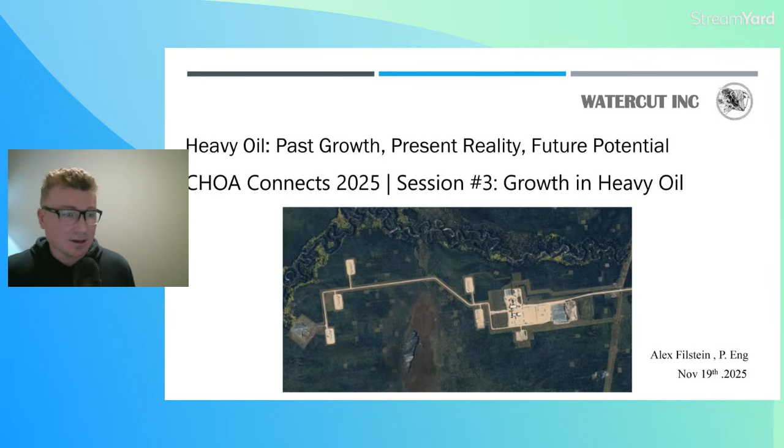And so I'm looking forward to sharing the whole slide deck from what I prepared, and I think it could be useful to everyone that's involved on X and LinkedIn, and who cares about this topic, to see where we go from here when it comes to heavy oil: past growth, present reality, future potential. And this was part of my talk at the Canadian Heavy Oil Association.

So the importance of Canadian heavy oil, from one perspective, is in the concept of reserves. As of 2022, world oil reserves: you can see here Venezuela 17%, Saudi Arabia 15%, Iran 12%, and Alberta within Canada is 9%. Now, over 90% of that oil is Canadian oil sands. And on the right, you can see 80% in situ, 20% mining. So out of those reserves, and we're talking about 170 billion barrels, something like 135, 140 billion barrels will be in situ.

And the main difference is that in situ barrels, you cannot really mine like you would mine at surface. At surface, you will use trucks to mine the oil sand. You will take that sand and the oil that's saturated within that sand and process it, remove the water, remove the sand, sell the oil and then refine it. You cannot do it in situ because it's just too deep to mine. And so that's one of the angles: the opportunity associated with Canadian oil reserves when it comes to past, present, and future is fairly significant, and that's why it's important to address.

The other angle here is that Canada is one of the top global producers of crude oil, including lease condensate. As of 2023, Alberta was producing similar rates to Iran, China, Iraq, but the Canadian population is nowhere close to the population of those countries. And so Canada, Alberta, plays an important role within broader oil production rates. You see US 16%, Russia 12%, Saudi Arabia 12%. And so Alberta is right there.

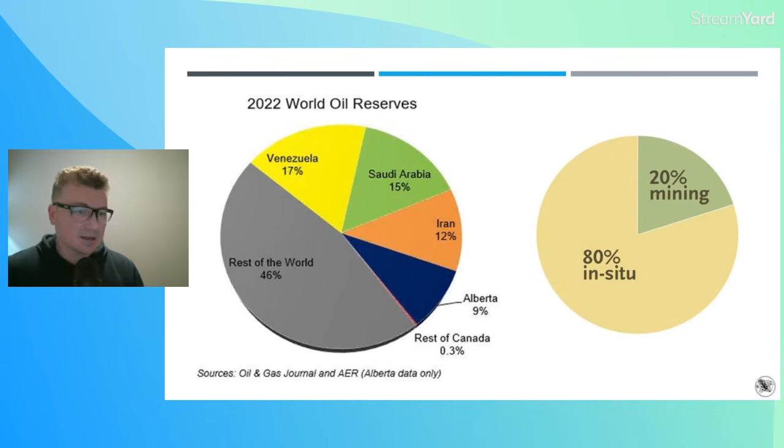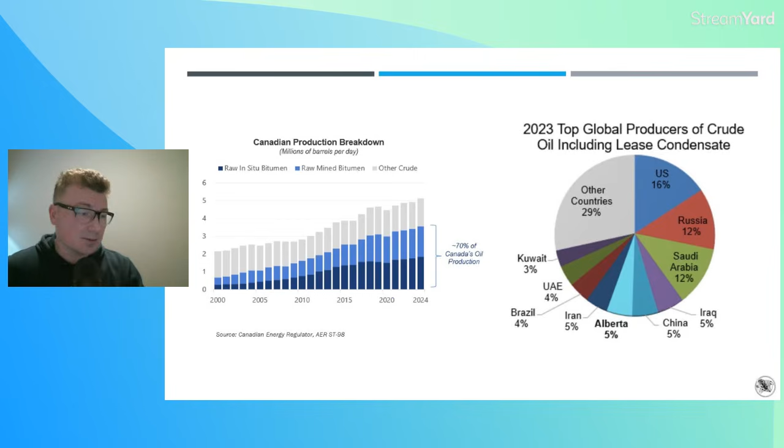And my talk will focus mainly on the in situ bitumen because, just like what we said in the previous slide, the majority of the reserves are in situ. 80% are in situ bitumen reserves, where production right now is about 1.7, 1.8 million barrels a day, and about to increase to 2 million barrels a day.

So the main technology that drives the recovery scheme for in situ production is the SAGD technology. And on the left, you can see the way it works. You will have an injector well, so you inject steam through that well, and a production well at the bottom. And what you really want to do is inject steam so you can transfer the enthalpy that carries that heat downhole, transfer that heat to the oil, and drain it by gravity. So that's why it's called steam-assisted gravity drainage.

So you can basically produce the oil, which is as hard as a hockey puck and too deep to mine. As you can see, way in the ground. It could be 300 meters, 400 meters or so. And that pressure could be 3,000, 4,000 kPa, right? And so you've got to inject that steam at steam conditions, transfer that heat, and produce that oil by gravity. And this is the core technology today that's utilized for in situ production.

The inventor of this technology is Roger Butler, and he developed this concept in the late 1970s, but the concept was commercialized in the late 1990s, 20 years later, right?

So one common theme that I hear people complain about is that technology development takes a very long time in our sector, but the reality is the core technology, which is SAGD, took two decades to develop and commercialize, and then another two decades to really bring it to 1.7 million barrels a day, while we're still optimizing on this concept.

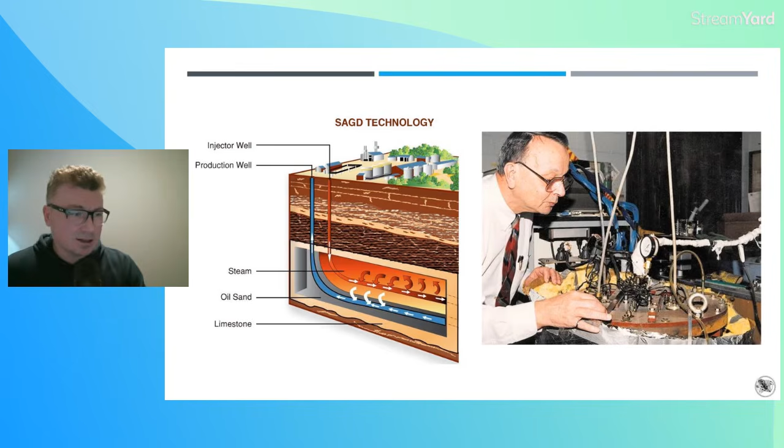And you can see he is working on some kind of pressured vessel there. We're trying to maybe optimize some VAPEX process complementary to SAGD, which is a vapor extraction process, where non-condensable gas could be co-injected with steam to maintain the bottom hole pressure in those reservoirs. And so he's been working very early on that, and we see huge implementation of non-condensable gas utilization in our current reservoirs. And the steam chamber development in SAGD, solvent processes, non-condensable gas processes, is really a function of equations of state that we utilize.

So often we will use the Peng-Robinson equation of state, but here I put a very simple one. It's PV = nRT, so the ideal gas law. And in the presentation at the CHOA event, there was a presenter, his name was Chad. He talked about how every smart presentation should have some kind of equation, and this was my equation version for that. And this is derived from the Boyle-Clapeyron equations of the ideal gas law, but let's focus on what it really does here.

So P stands for pressure, right? So in situ, you already have built-in pressure because of the height of the chambers, where they're located way underground. So 300 meters, 350 meters, 400 meters. And so the pressures, as I mentioned, could be as high as 3 MPa, 4 MPa. Now you have the concept of volume, which is V, where you inject steam. There is a displacement mechanism, but you also need to pressurize.

And over time, as you develop the steam chambers, as you can see in this picture, you grow those chambers, but you need to inject more and more steam over time, which increases the steam to oil ratio. And that's why non-condensable gas utilization is taking place, to basically reallocate the steam. And that's what we're seeing in the industry. And so the industry is also busy with the amount of substance that's being injected, basically steam. And that's one of the core challenges, that you don't have infinite steam.

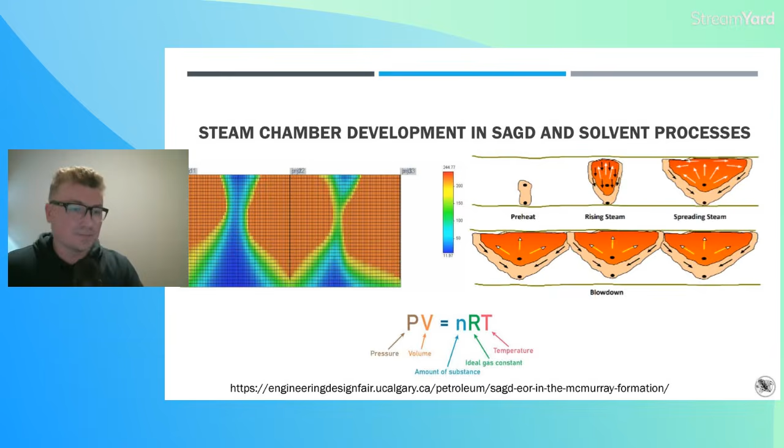In addition to that, there is some lithology associated with reservoir parameters. So for example, we could have a sandstone that could have very nice permeability, very nice porosity, very nice thickness, as I mentioned, but you can have other geologies in those reservoirs, like breccias, IHS, mud-dominated IHS. Those stand for inclined heterolithic stratifications. And those really are mud-dominated beds, sandy interbeds or muddy interbeds that are not necessarily good for reservoirs.

They're almost like ceilings in the middle of your reservoirs, and they basically limit steam chamber growth. They could result in no heat transfer to upper levels of the steam chambers. They can also hinder steam chamber development. So those are the things companies are also focused on these days.

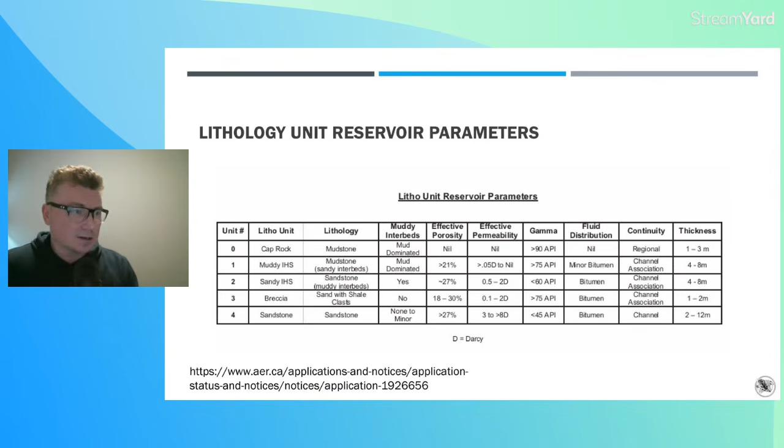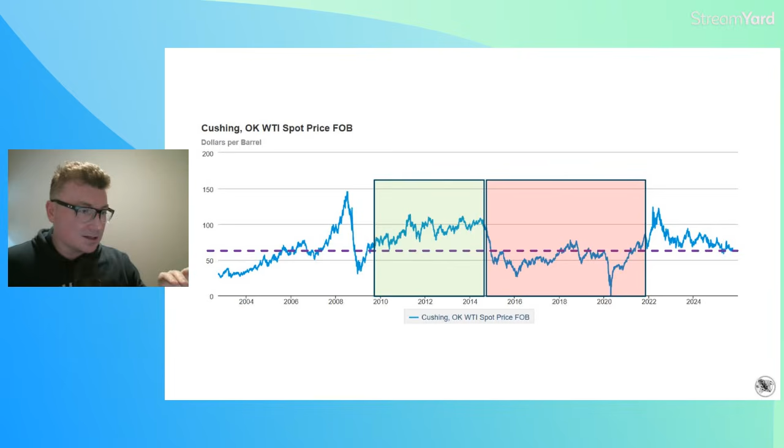Okay, so let's look at some examples right now. If we go back to the oil prices, you can see here, right? And we're going to see soon some examples of oil production rates. You see the green rectangle, so 2009 to 2015, and red rectangle, about 2015 to 2022. So very important time frames, oil prices high, and oil prices low in red. And let's see what happens close to those time frames.

And there was a comment at the conference by Tom Geer from MEG Energy. He mentioned that not everything is about home runs. The current development in the sector is really about singles and doubles, right? So the home runs were during that huge growth time frame, between, I would say, 2005 to maybe 2016, 2017. But then the ability to generate steam or injection capabilities through boilers and OTSGs is basically plateauing, but you're still able to produce a significant amount of oil.

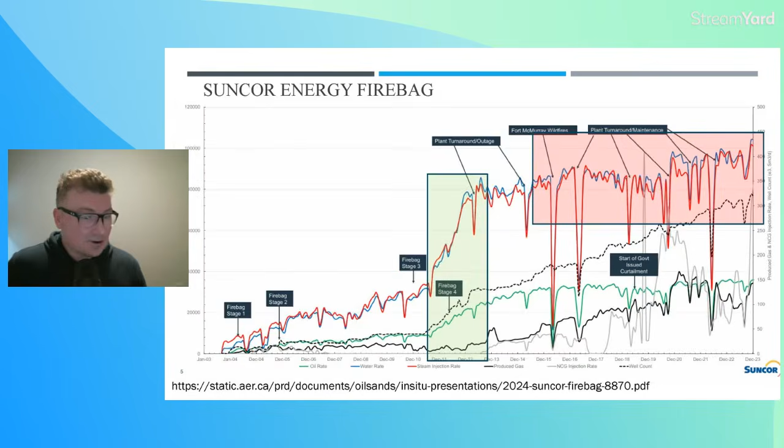Now, as we talked about NCG co-injection, you would notice that I mentioned the gray graph here is injection of that non-condensable gas. But look what happens here. They're telling us that on the vast majority of their legacy well pairs and pads, they in fact inject a significant amount of non-condensable gas; co-injection has been implemented on the following well pads at Firebag.

So 101, 102, 103. And what this speaks about is the coalescence of those steam chambers with those pads and their ability to inject NCG. It doesn't condense, so it's non-condensable, and it allows pressure maintenance in those chambers.

Now, the main driving mechanism, though, for those chambers is the steam injection, because that's what transfers the heat to produce oil by gravity. But then you have a challenge of the steam chambers basically coalescing, growing, and as you develop steam chambers vertically, you don't have as efficient of a heat transfer, so your steam to oil ratio by definition is going higher.

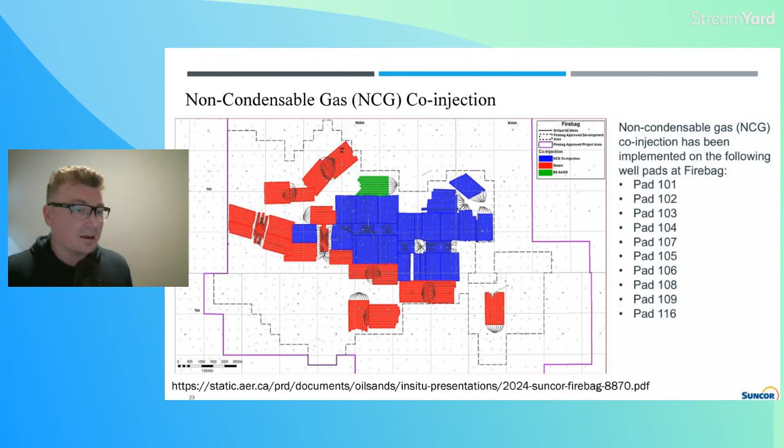And this technology really helps them to maintain a steady steam injection rate, but growing the asset and developing better geology, as you can see in basically red pads.

So here is another example of one of the biggest assets, and just to put this in context, I picked those assets because those are the biggest assets in Alberta, and they're around 1 million barrels a day from the sample that I talked about, which is 1.7. And so I think those are very important to consider.

So what you see here, you see growth in Christina Lake. So Christina Lake now is going to be kind of merged with Christina Lake for MEG, that just got acquired by Cenovus. And you can see here, again, significant growth in the green rectangle, somewhat plateauing steam injection rate in red.

So during that time frame, oil prices were challenging. And oil production rate goes, similarly to Suncor Firebag, to 250,000 barrels per day or so. And again, in the yellow chart, they utilize non-condensable gas co-injection and are able to maintain bottom hole pressure for legacy well pairs while reallocating the steam to new pads.

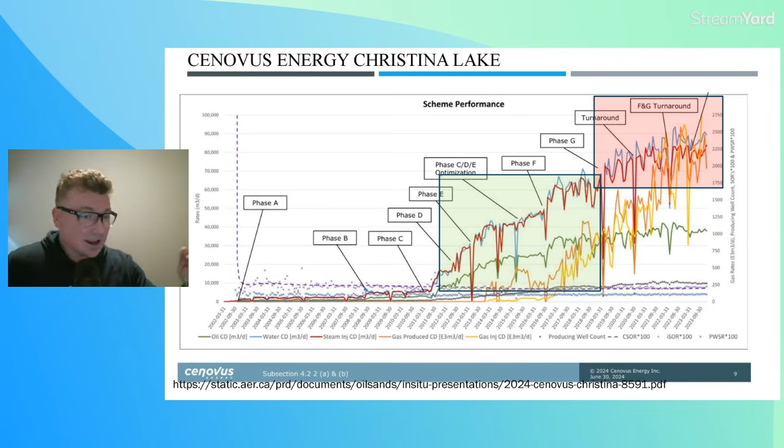What's really interesting in this time frame is that phase F and phase G, as you can see on this graph, it seems like it comes online a little bit later. And they actually talked about this in the 2012, 2011 AER disclosure about phase F and phase G amendments, and in 2011 approval for phase G and phase F. And so it came online in 2017.

And my key message to the audience at the conference was that, look, these are very complex projects. They take time to develop, they take time to design, they take time to put things in place. And those are not trivial, especially on this scale. And so we have to be mindful that when you go on such projects, not only does it take significant capital, it also takes time.

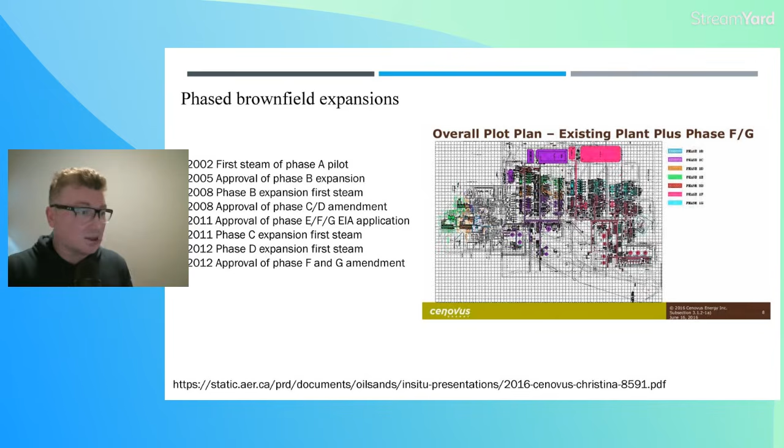And that's why during the downturn, we didn't see holistically in Alberta and Saskatchewan big projects being advanced from a greenfield perspective, and mainly kind of add-on brownfield projects.

So here now, let's talk about MEG Energy Christina Lake. So MEG Energy just got acquired by Cenovus, and we see a very similar story. During the 2014, 2015, 2016 timeframe, we see significant growth in steam capabilities. So phase 2B was very important to them. But at the same time, this growth, this capital was spent going into a downturn, right?

And so it was very challenging to be in MEG for that amount of time because you invested that capital, you grew your oil production close to 100,000 barrels per day from maybe 30, 35. So on this chart it's about 5,000 cubes a day, so that will be about 30,000 barrels a day. And now you bring it to 100,000 barrels per day at SOR 2 to 2.2, 2.4.

And you basically can't cash flow as much as you assumed between when oil prices were $100 a barrel, which is very complex and kind of not intuitive, I guess, because now your assumptions were not really realized in a sense. And so this speaks again to the huge uncertainty we have now going forward when it comes to bringing those type of assets online.

And the question is, at $59 oil, are we going to see those type of phases coming in where you need to spend significant amount of capital to advance these programs? And so my message to the audience was, my view is that what we're seeing now is basically the status quo, where we do see some brownfield development on some of those projects that are somewhat smaller, but we don't see greenfield development on the mega projects like what we've seen before. And this is a good example in phase 2B.

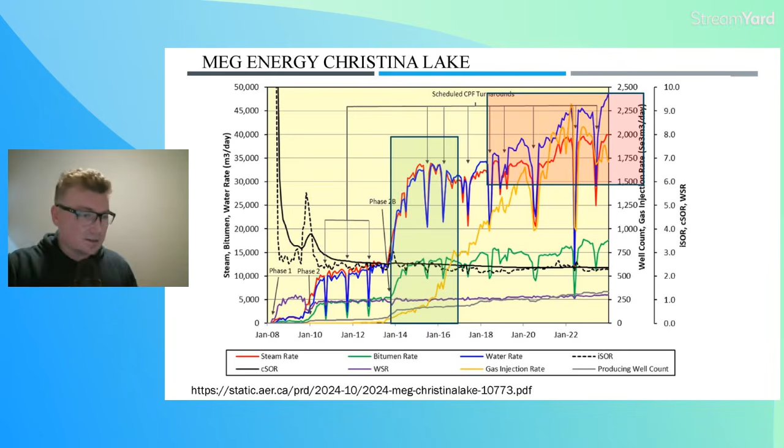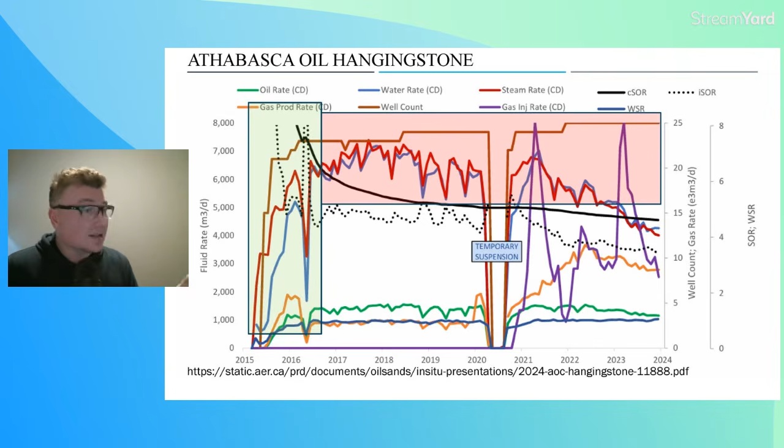Now, their configuration for the Hangingstone asset, which is what we just talked about for the Athabasca Oil Hangingstone asset, looks like this. So they basically have fork-type shapes, where the different pads are almost merging together. So when they co-inject non-condensable gas, it moves across the pad. So maintaining bottom hole pressure becomes extremely important. At the same time, you run a very high risk of that well short circuiting into your electric submersible pumps.

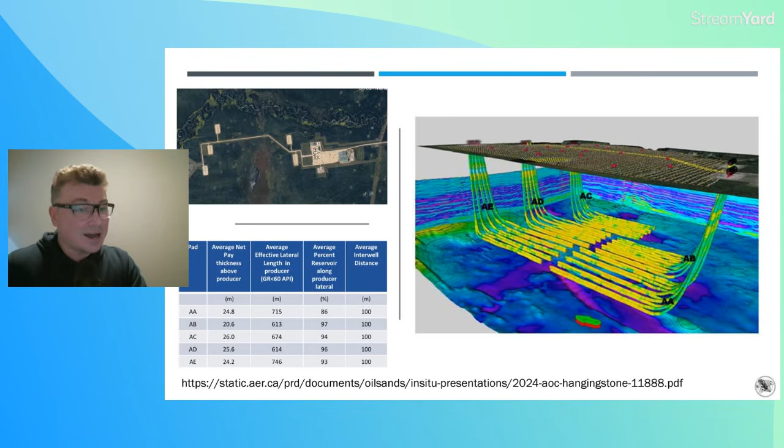And this is intriguing to me because it's not a typical configuration. And the 2 well pairs they drilled there, because of the innovation in well lengths and the completions and all that, are much longer wells, and therefore they produce much more than a typical well would. And the average interwell distance between the well pairs will be 100 meters. One thing I mentioned is that the opportunity is also in drilling new infill wells. And my understanding was that maybe that's something they could be doing in the future.

So in the industry, we have well design, length, trajectory, flow control devices dealing with complex geologies. You can see the injector and producer picture on the left. You can see very complex different geologies. For example, yellow could be low permeability, low porosity, IHS regions. And you could close a flow control device and control the output of steam to the reservoir in those sections a little bit better. So the industry is becoming really good in those types of technology developments.

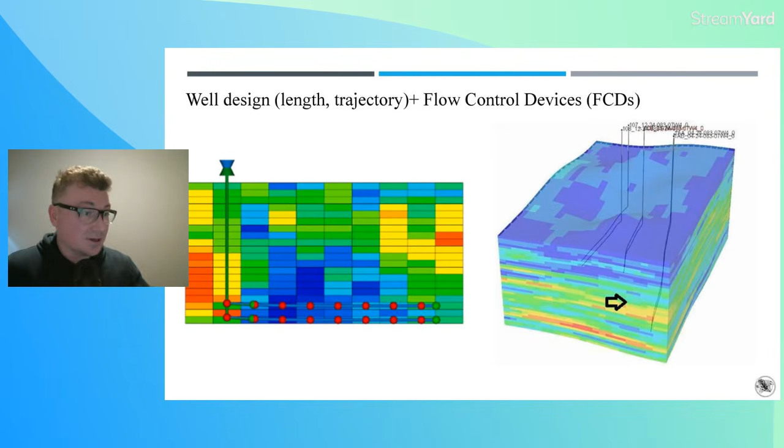Also, all these interbeds, IHSs, are very challenging and very heterogeneous. And so companies are doing a good job trying to go into cleaner pay, and a lot of advancement from that perspective. And therefore, as we go forward, those assets are becoming more heterogeneous. Because you're better off drilling nice pay wells early on, because there are fewer operational challenges, but there's real opportunity in optimizations as we go forward. So that was my key message.

Also, companies are drilling infill and redrill wells. And on the right, you can see an example of that. So you could have different steam chambers developing. You can see the temperature of the steam chambers in the picture on the right, but they could be in very different shapes. So you could drill or redrill a producer to the midsection where you do have heat transfer, and that oil can be drained by gravity without an injector. You could also do that if you land a little bit lower or to the side. So we see a lot of companies trying to optimize that way.

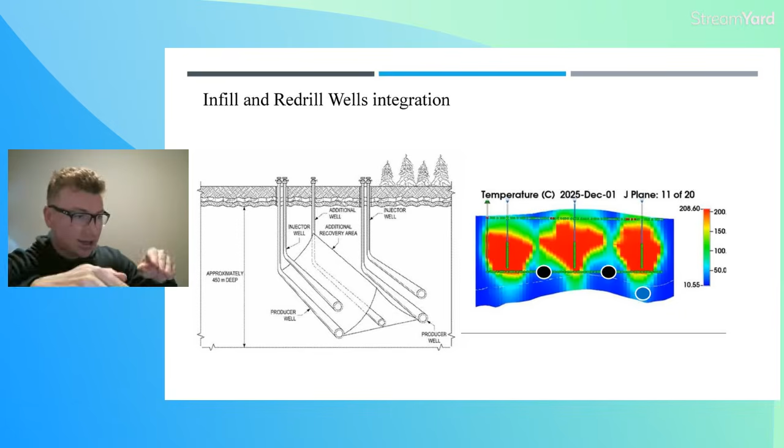And also in the picture on the left, you can see the teardrop shape where the heat has already been transferred, and you can recover that oil from that section and produce it to surface. One project we see that's very intriguing, and I share this with the audience, is the International Petroleum Corp Blackrod project. This project has 259 million barrels of resource. The capital expenditure is about 850 million USD. There's some local expertise in SAGD operations from the people that operate this.

The expected production for phase one is 30,000 barrels per day. And that gives you an equation that in Canadian dollars, from a development point of view, a flowing barrel will cost something like 30,000 per flowing barrel. Now, MEG just got acquired for over 80,000 per flowing barrel, and in the past we saw assets such as this one getting acquired for just over 60,000 per flowing barrel.

And so what they say here makes a lot of sense to me, because the upside is 1 billion barrels for 2C resources, as they're communicating there. But also from NPV10, you're looking at 1.4 billion USD, and a $50 USD per barrel WTI break even. And so that makes a lot of sense if you have unique situations where you can greenfield develop something with a smaller amount of capital. You could monetize that and make money doing that.

But we just don't see it on the mega projects, like the Firebags, the Foster Creeks of the world, like we saw 20 years ago, because that capital is essentially not allocated for that purpose because of price volatility, and because companies are busy buying back shares, paying down debt, and paying dividends.

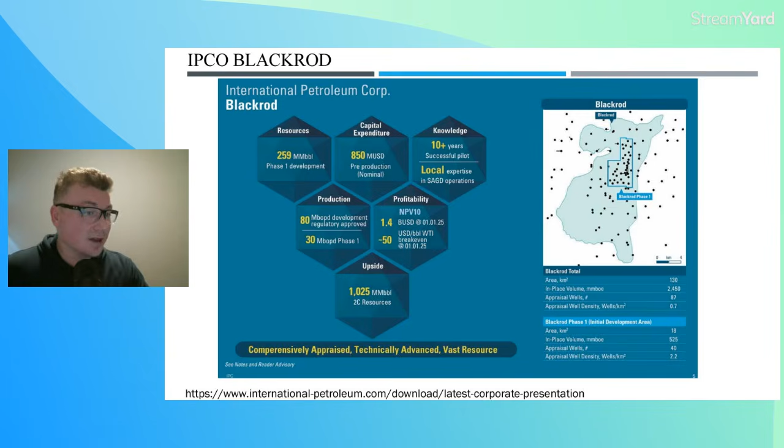But how did they get to this point? This is something also important to talk about. What they've done between 2011 and 2023, they basically had pilots. But their timing was very interesting, because as they were ramping up steam injection rates, you can see in red, they got oil production to about 100 cubes a day on the well pair and produced that over time.

But then they got into this low oil price environment. Now, this is not necessarily IPCO. This is Black Pearl, the legacy company that IPCO acquired. My understanding is that they ran this pilot to develop the greenfield project there. But there was this natural extension for over a decade to really test the geology, understand delineation, understand the strat wells that had been drilled, and what the geology looks like, but also test what kind of production you see from wells.

So in 2011, they constructed the Black Rod facility to start well pair 1, in 2013 commissioned well pair 2, in 2015 shut in well pair 1 and in 2019 drilled and completed well pair 3. And so what you see now is well pair 3 producing about 100 cubes a day. So that would be 630 barrels a day or so, maybe 650 barrels a day.

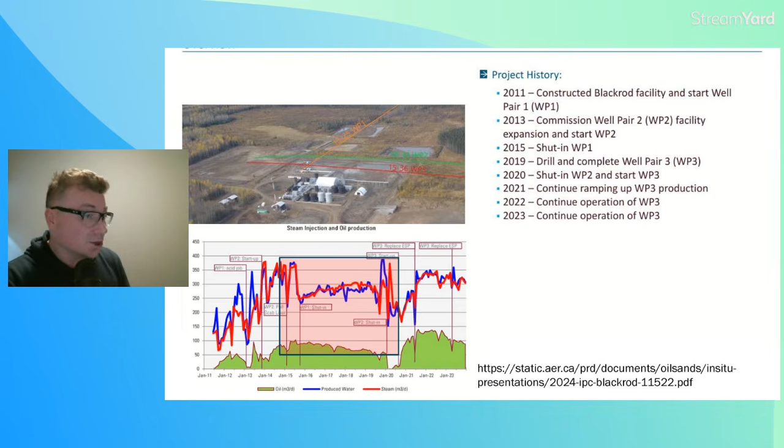But nevertheless, they go ahead and scale this operation, and are now building what I shared in the previous slide, a project on this lease to produce 30,000 barrels per day in that phase, a greenfield development. But again, in the context of this industry producing 1.8 million barrels a day from SAGD in situ, we don't see huge projects coming online, and this will be one of the bigger ones.

So in summary, major capex is already deployed. As you saw, significant growth in steam generation capabilities, boilers, OTSGs installed, and the assets expanded through brownfield expansions. They've done a lot of smaller singles and doubles instead of giant home runs. But the company is really focused on the balance sheet as well. And many of those assets have already paid off the initial capital. Therefore, they're in post-payout status.

So as you saw also from my charts, asset decline is not really a thing. Steam reallocation using NCG co-injection and much slower pace growth is what we're seeing. We're going through a phase where we see a shift from greenfield to brownfield optimization. Not everyone's doing that, obviously, but the players that do that just don't have the scale where you can grow production by 1 million barrels a day or so, right? So we're not seeing big projects.

And I think this is really important because we hear a lot of conversations about pipelines and expanding pipelines. The concept there is, okay, let's say you get a pipeline like an Enbridge mainline, 3 million barrels a day. But it almost looks impossible to fill that pipeline in a timely manner if the companies don't shift their in-house policies toward growth-oriented production. Of course, the government would love that, but it's very challenging for me to see how you build a big massive pipeline and fill it as well.

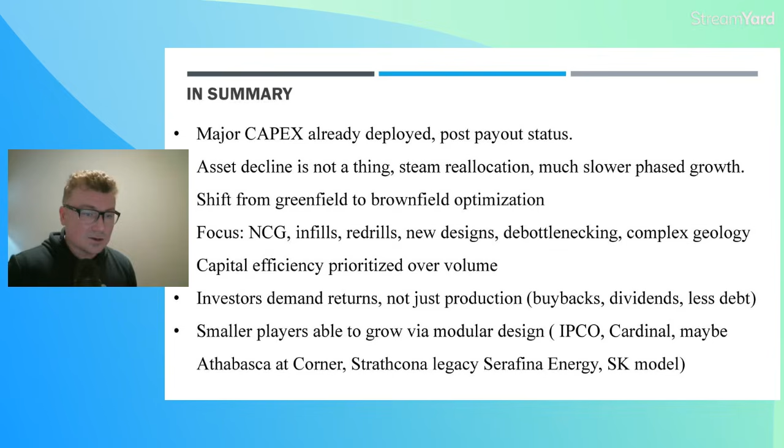Obviously, it's a very dynamic environment, lots of moving parts, but hopefully this graph helped you to understand a little bit more. And this was my closing chart at the conference. And obviously I had only 15 minutes. I spent a little bit more time here explaining a little bit more to the audience.

The key message is for the viewer to think about this concept and think, okay, but these oil companies also see this type of confidence intervals and this kind of short-term outlook. So is there an incentive to grow infinitely and build greenfield facilities? And my answer is no. There's not much incentive. And that's why my message was, we understand the past, which is what I presented today. We understand what's present, what's currently going on.

And the future, I think, in the next couple of years looks a little bit like what I described so far, which is unique greenfield opportunities on a case-by-case basis, but mainly brownfield optimizations, with the majority of the capital being allocated towards buybacks, dividends, debt reduction, especially with those types of short-term energy forecasts, where it's very difficult to invest capital if your cash flow projections are being challenged. And so that's really my key message.